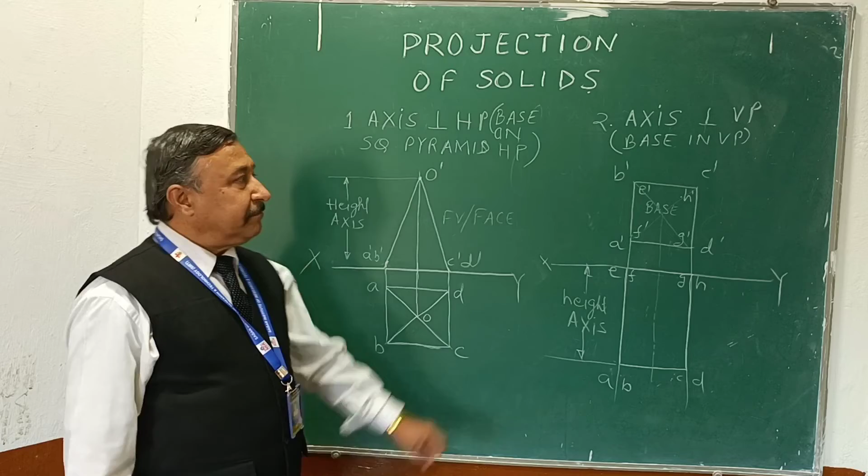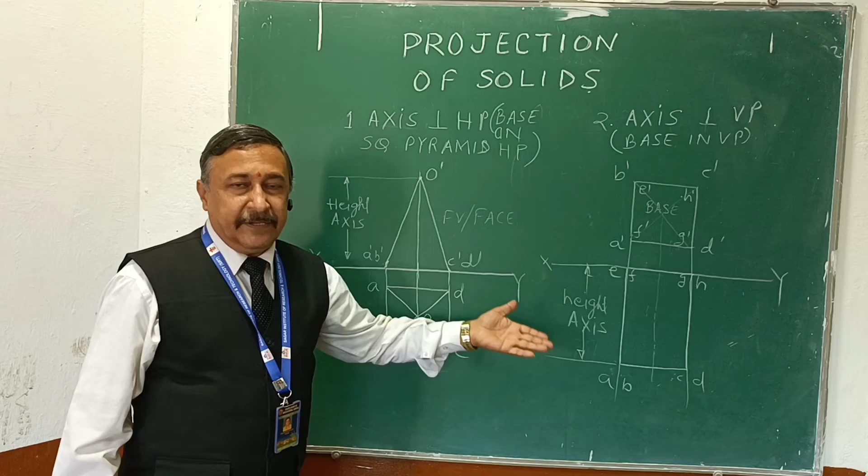In the third lecture of projection of solids. Now, this is the question. As you remember, we saw last time the two basic positions of projection of solids, that is axis perpendicular to HP and axis perpendicular to VP. Okay. Now today we see the third position, means the next position of projection of solids.

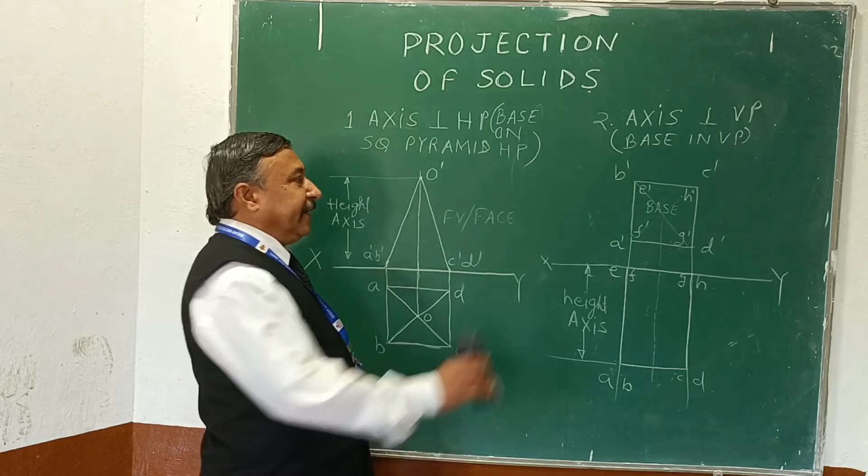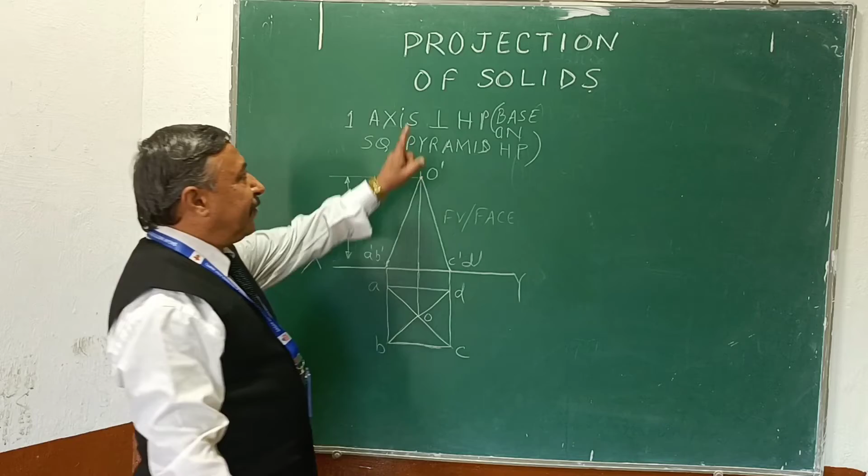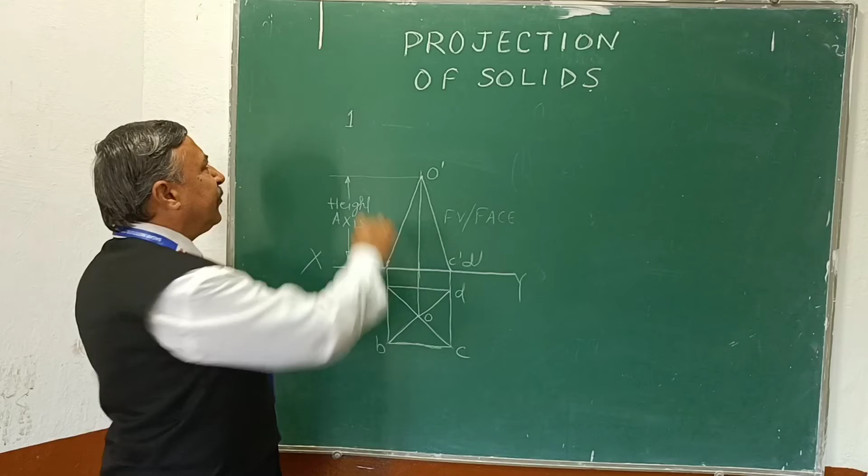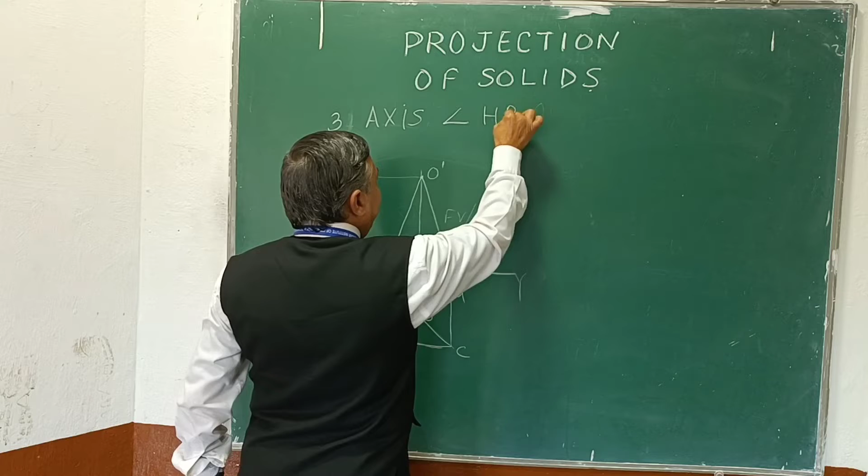So I continue from this position only and explain to you how we start from this position and complete the next position. So first I write here third position. So what is our third position? This is our third position. Axis inclined to HP and parallel to VP. This is our third position. Axis inclined to HP and parallel to VP.

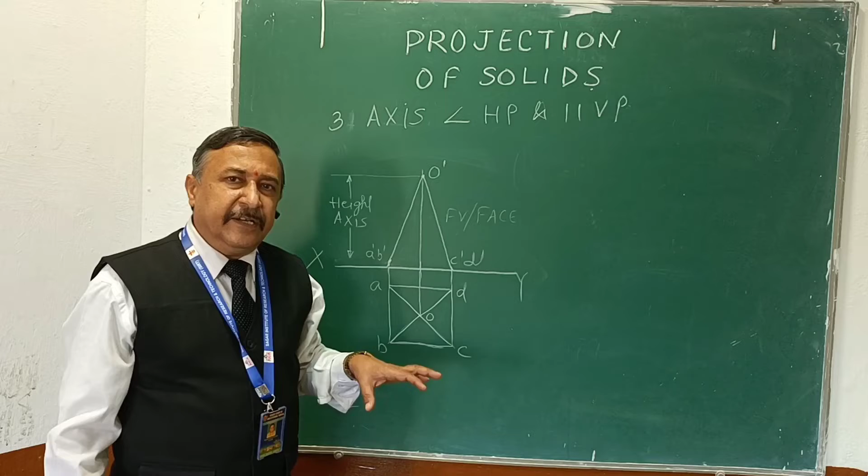Now see here. Axis inclined to HP and parallel to VP. And you know that in the position of straight lines, one parallelness is compulsory or important to start the question, because first we have to draw either true length or true shape or true base like this. So first we assume that this is perpendicular. And our first initial position is perpendicular to HP, as we have drawn last time. So this same position we draw first.

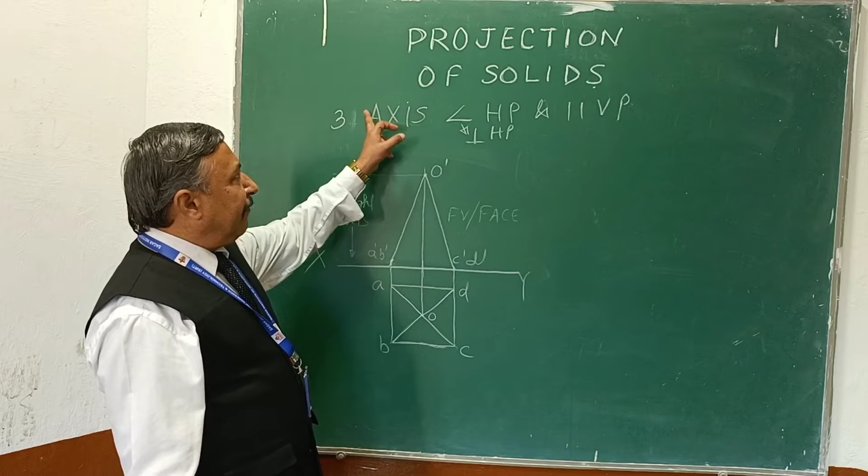This is axis perpendicular to HP. We take first a problem of pyramid and next we will take a second problem, that is of prism. So this is the basic position first. If you remember, last time I told you that these are two basic positions, perpendicular to HP and perpendicular to VP, and every problem should start from this position. So if our axis is inclined to HP and parallel to VP, first we assume that it is perpendicular to HP and we draw the perpendicular to HP position.

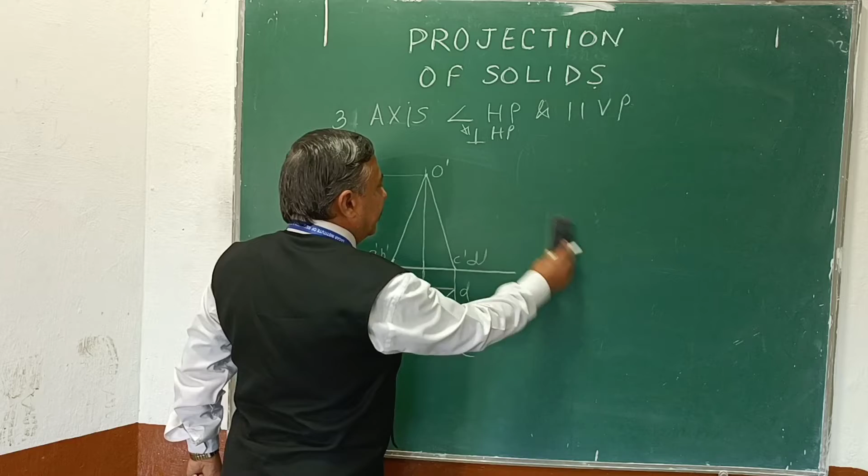This is a square pyramid, as you know, last time we have drawn it. So this is square pyramid, axis perpendicular to HP. Now we further move to the second step. Now see here how we incline this position. See, this is axis perpendicular to HP, and we have to draw axis inclined to HP. Suppose first I have drawn the axis. This is the axis. And we take random data. Suppose our theta is equal to 45 degrees. So this is our axis.

Now how do we draw this solid about this axis exactly such that it tilts like this? So when it tilts like this, this corner is on XY. This is the length of axis. We mark the length of axis here and join here. So this gives us the position inclined to HP. But how do we draw it? In this process, it is not easy to draw. So we take another process. Now see here how we draw this position.

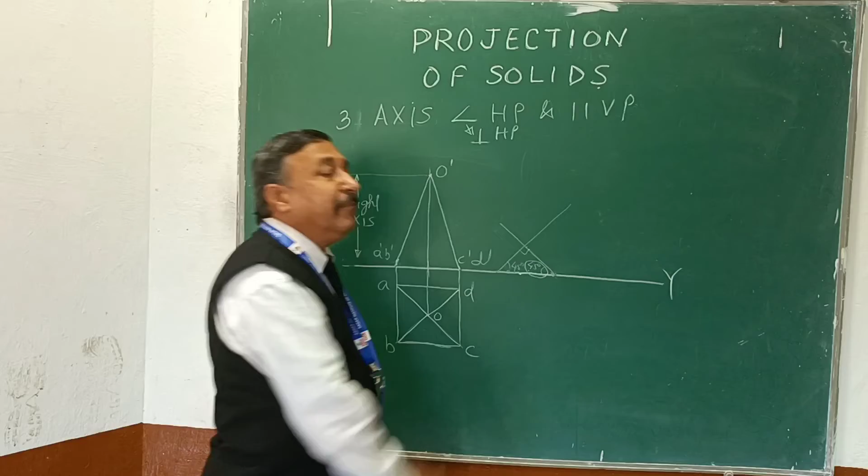If you see, this is the base of the pyramid and this is the axis. So if the axis inclination is 45 degrees, what is the inclination of this base? This is 90, so this is 45 degrees. Means the inclination of base is 90 minus theta, whatever is given in the question as inclination to HP. So we subtract the inclination to HP from 90 degrees. That angle is the inclination of base. So from this point we start.

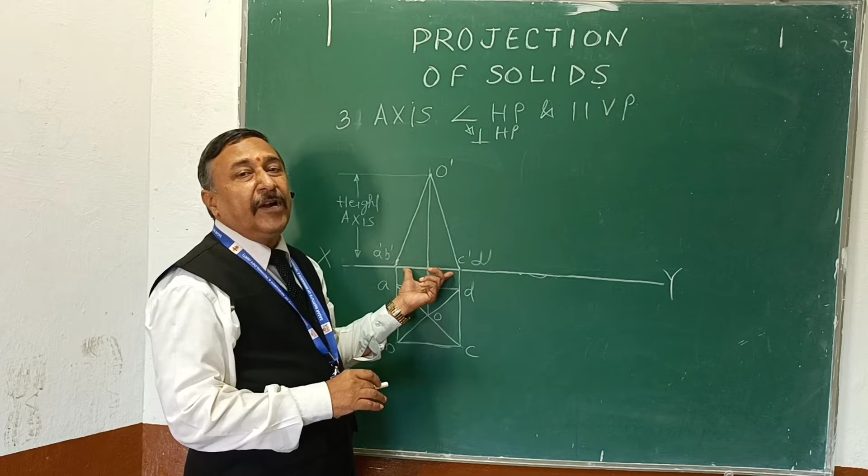So we incline this base 90 minus theta. If we assume the angle is 45 degrees, 90 minus 45 is again 45. So we incline this base 45 degrees. So we draw here 45 degrees. This is the angle 45 degrees. No need to write it here because we show the angle at the position of axis. Now take the position of this axis. We have to draw the position of axis. So simply by compass we take this length and mark here. This gives us the position of axis. Now draw a perpendicular line.

This gives us the position of axis. So you have right here, theta is equal to 45 degrees. This is the position of axis. Now the same length we mark here, so we get another point of base.

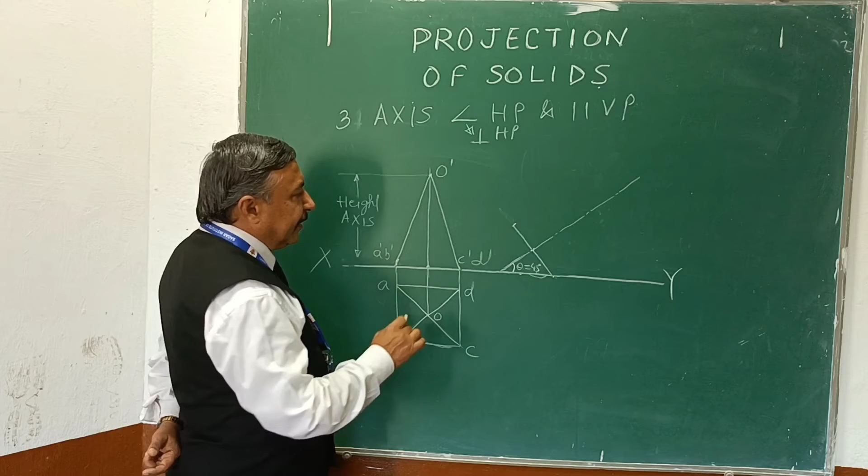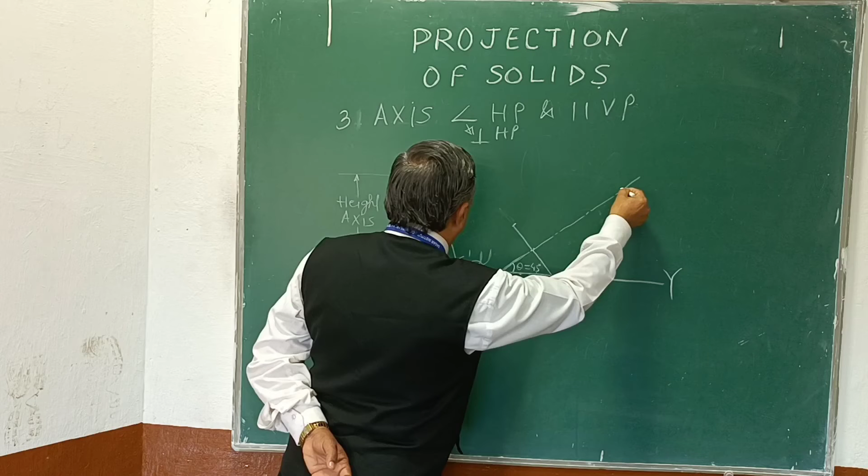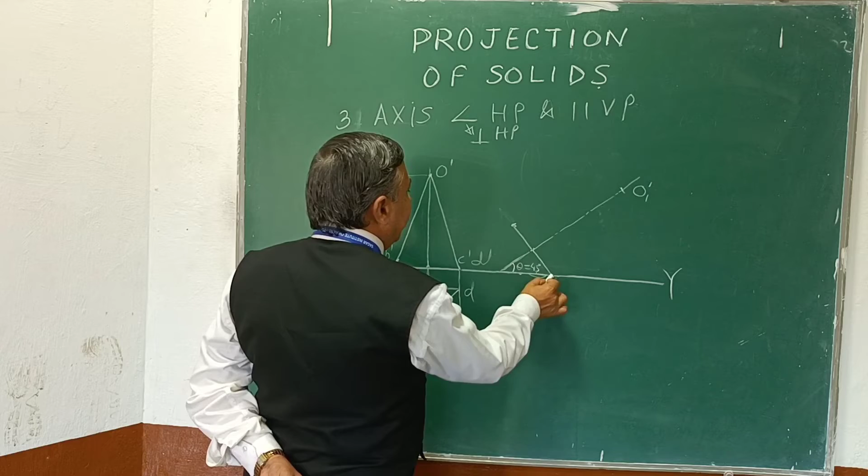Now the length of axis, or height of axis, is given. So from this point we mark the length of axis. This is our point O1 dash. Now join. Okay, we mark these points first. This is A and B. So this point is our A1 dash and B1 dash.

And this point is our C1 dash and D1 dash. Now join O1 dash to A1 dash, B1 dash, and to C1 dash and D1 dash. So this is the inclined position of this pyramid. Axis is inclined to HP. Now see here, axis is inclined to HP.

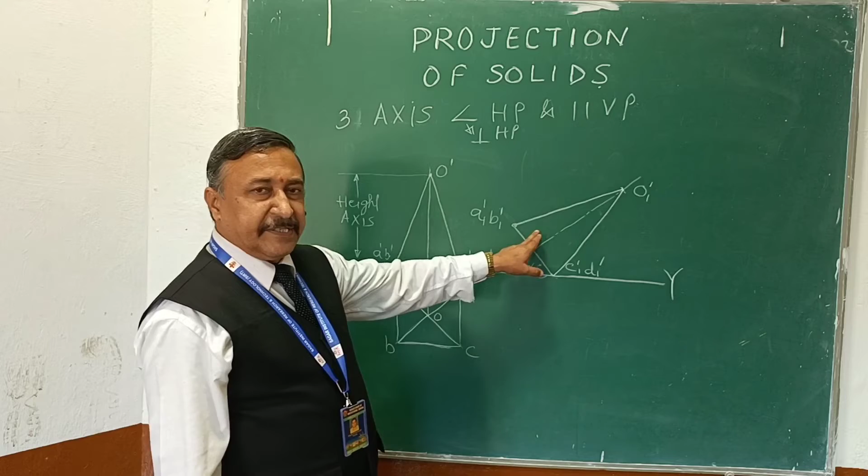Now on the basis of this, we have to draw the top view. Now project all points below XY. Project all points below XY and draw the locus from the base of the last top view.

Then one more locus, that is from O. So draw this locus from O also. Now see what will be the intersection points. This is A1 and B1 dash, and this is A. So this gives you point A1 and this gives you point B1.

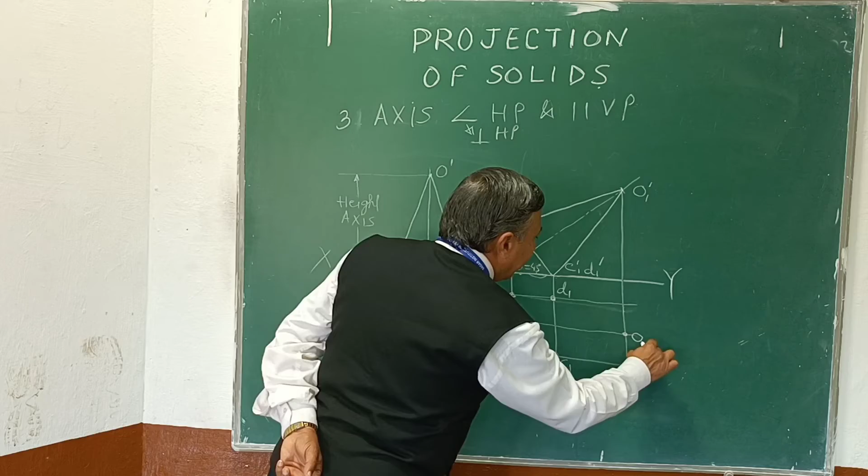This gives you point C and D, C1, and this point is D1. And this is O lastly. So this point is O1. Okay. Now we have to complete this top view. Now how? Now see here.

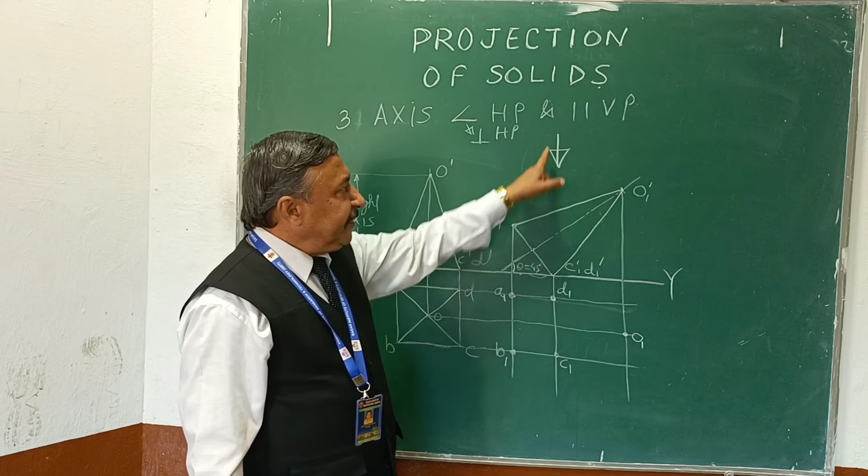First of all, we mark an arrow here. What is this arrow? This arrow represents the direction of observer. So if we observe from top, is the base visible or not? The position of base is like this. Means if we observe from top, the base is not visible. So if base is not visible, then what we have to do?

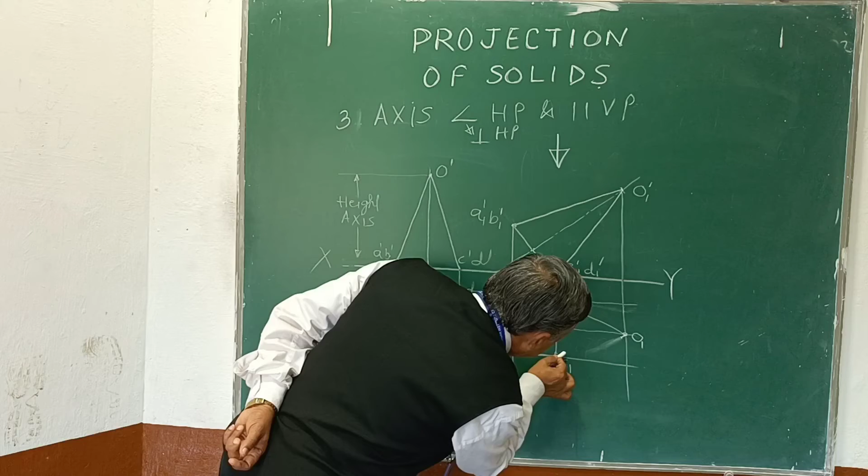Then we have to complete the outer lines, because outer lines are always visible in any solid. So we complete the outer lines. See, this is outer line, this is outer line, this is outer line, and this is outer line. Okay, I darken here. Now this is our top view, so we can darken it.

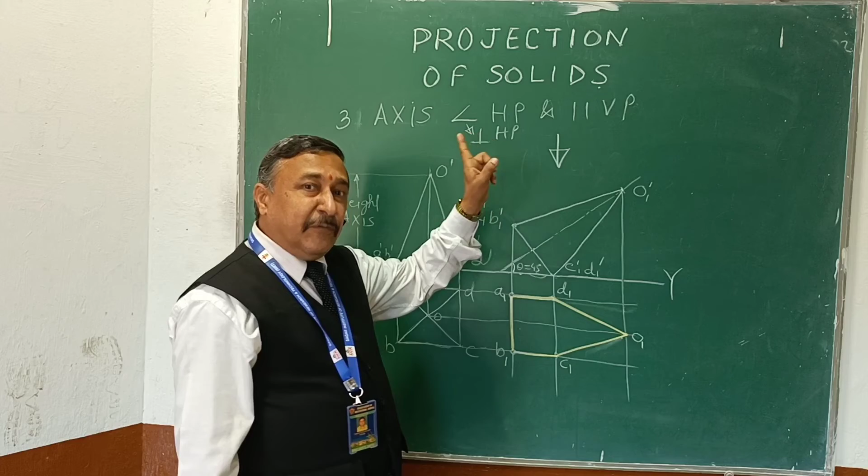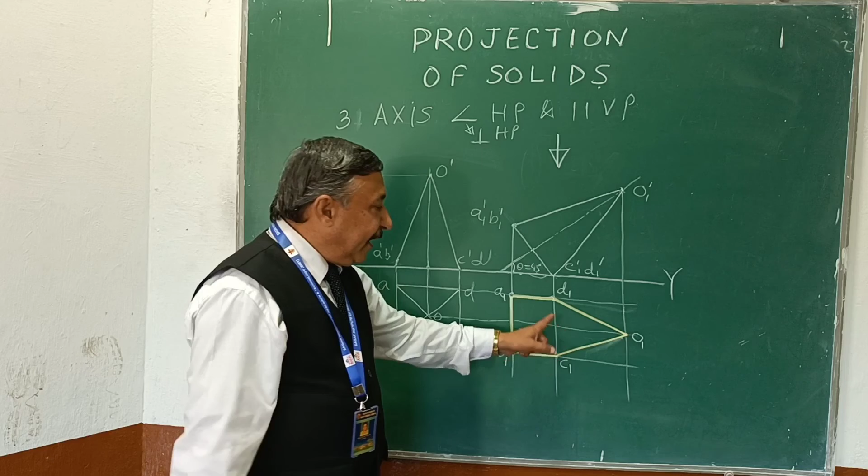So first we have to draw outer lines, because base is not visible. If base were visible, then we would draw the base. Now see, the base is invisible, means three edges of base are visible because these are outer lines, and only this edge is invisible. So we have to show this edge by using hidden lines.

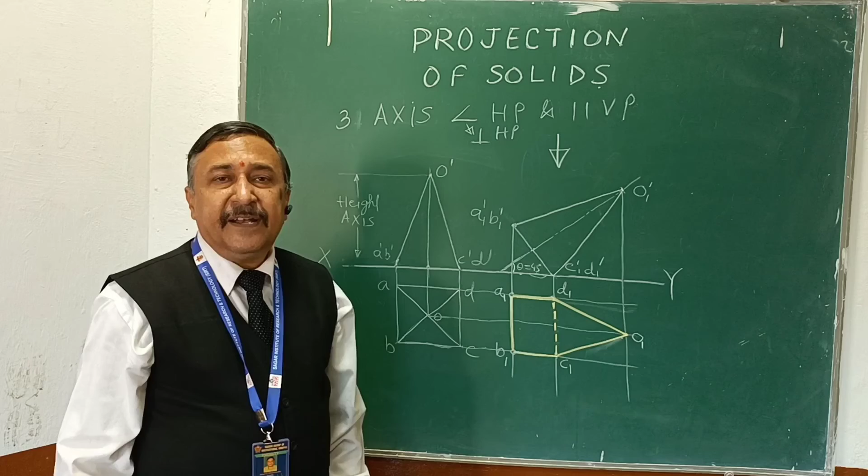As you know the application of hidden lines. So this is hidden line. Now we complete the solid. How do we complete the solid? There are four slanting edges in this pyramid: OA, OB, OC and OD. OC and OD are already shown on the drawing by completing the outlines.

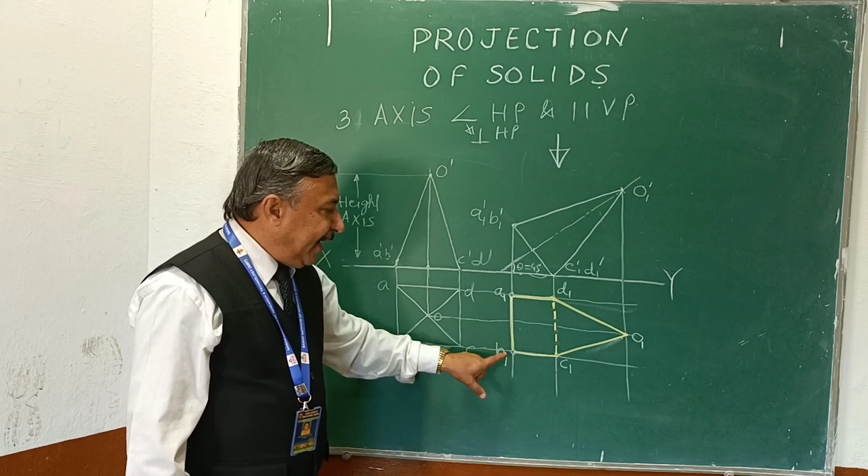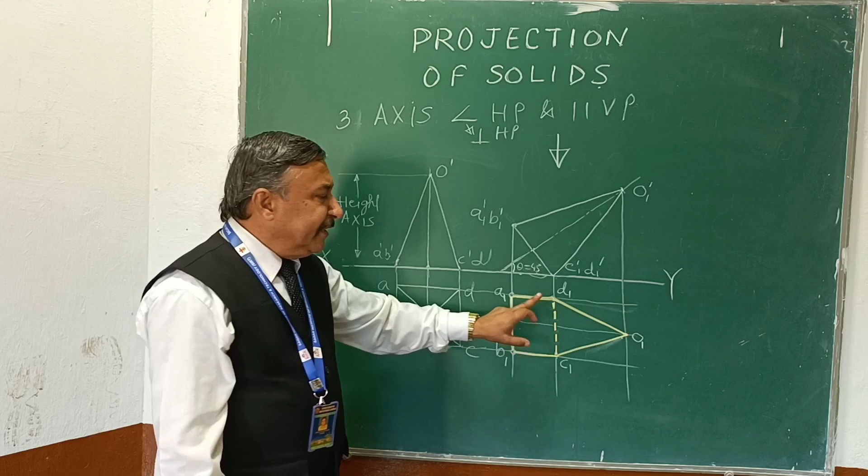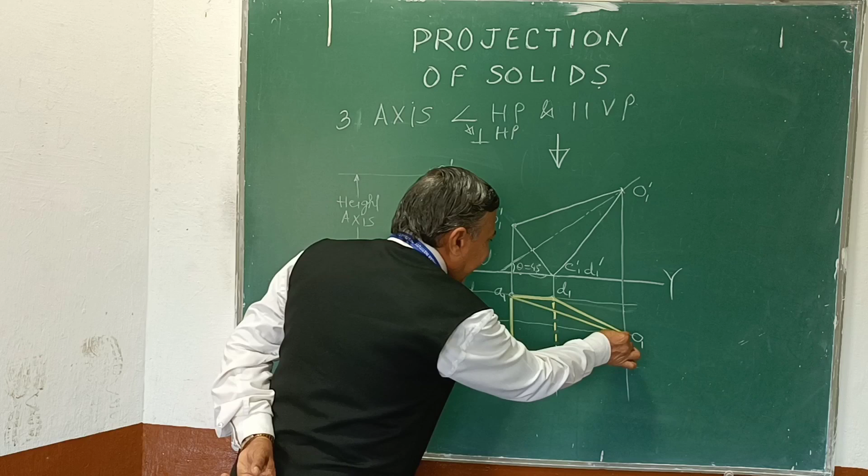But A and B, we have to join. Now how do we join them? If the base is invisible, then these edges are visible, obviously. And if the base is visible, then these edges will be invisible. So we draw complete lines. This is slanting edge OA, and this is slanting edge OB. Okay.